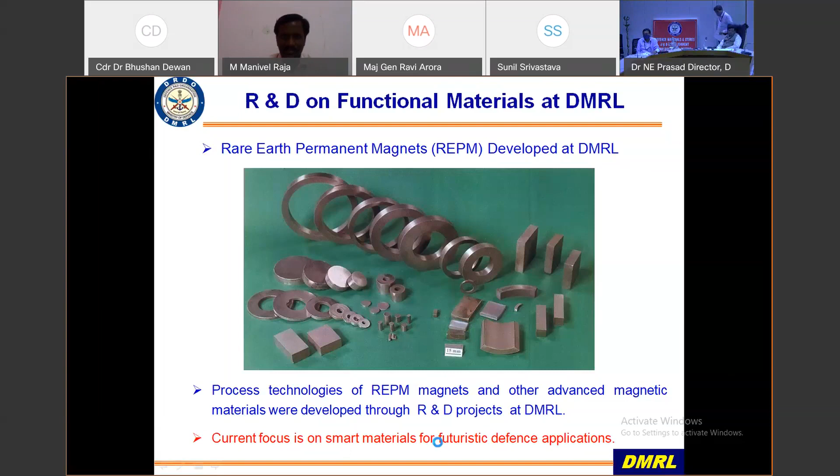Then shape memory alloys - there are two types. One is thermal shape memory, driven by thermal energy. The other one is magnetic shape memory, where the driving force is magnetic field. Then thermomagnetic materials, thermoelectric materials, magnetocaloric materials, and photo-responsive materials. These are the various types of smart materials.

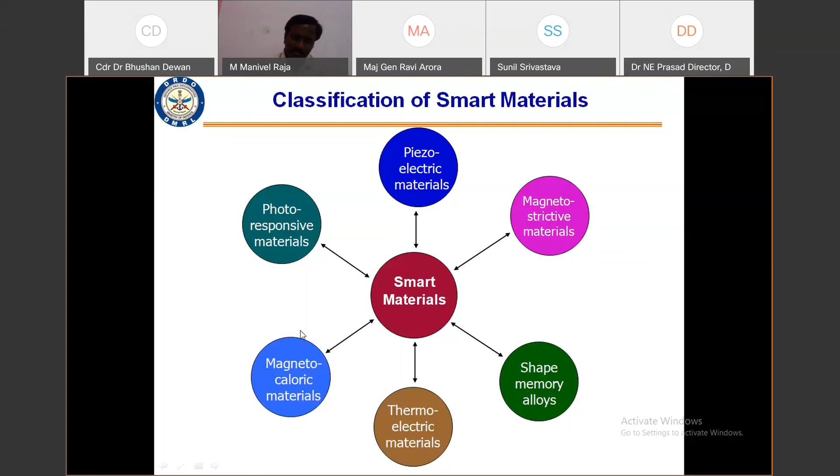So as I was telling, though there are different types of smart materials available, there are three main driving classes: heat or thermal energy is the major important driving force, then electrical field and magnetic field. These three types of smart materials are very famous, and these materials have already been extensively used in many applications.

So when you say heat, here the thermal energy is going to be the driving force. The example for that kind of shape memory smart material is shape memory alloy. It's basically nickel titanium. So here nickel titanium changes the shape when you change the temperature. So you can actuate, you can do the desired functions by simply changing the temperature.

The other type is the electric field driven smart material. Here when you apply an electric field to a particular material, it changes the shape or produces a strain. And vice versa, these are reversible effects. Similarly, if you apply stress on the material, it produces an electric field. The typical phenomenon is piezoelectricity. The very typical example is lead zirconate titanate, PZT, one of the very famous materials. When you say smart material, the first material coming to mind as an example is lead zirconate titanate.

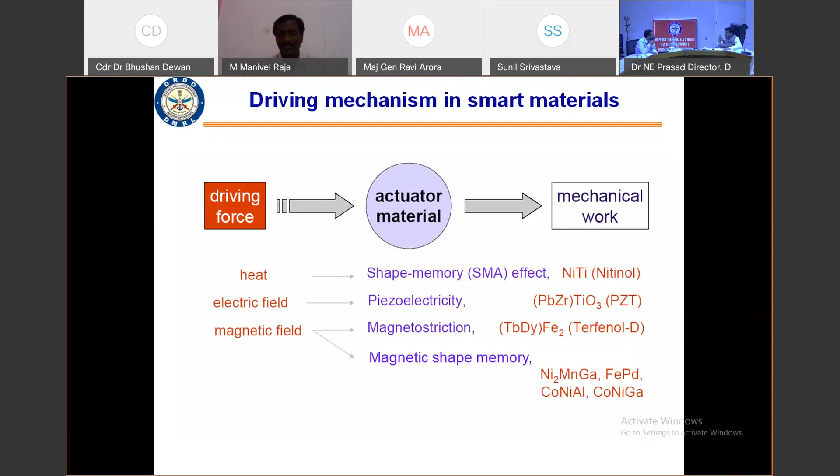So this is the kind of activities going on at DMRL. We have taken up R&D projects on these smart materials. The first one is the magnetostrictive material. This activity was taken up for the development of a sonar device for the Navy. Here the magnetostrictive material will replace the piezoelectric material. The current technology uses piezoelectric transducers in the sonar, but sonar using piezoelectric material works at very high frequencies. So in order to reduce the frequency of operation, the idea is to use magnetostrictive material, which can be used at very low frequencies, about 1 to 2 kilohertz. By reducing the frequency, we can increase the range. That is the advantage of magnetostrictive smart material.

The second material system we are working on is magnetic shape memory alloys, which is very similar to nickel titanium, but here the external stimulus driving the system is the magnetic field. Again, these materials can be used as sensors and actuators in many applications. The third material system DMRL is working on is a very new one, magnetocaloric materials, another class of smart material. These are very useful for magnetic refrigeration, an emerging technology. And the last one, we are also working on piezoelectric material, right now concentrating on piezoelectric material for electronic filter devices for the seekers.

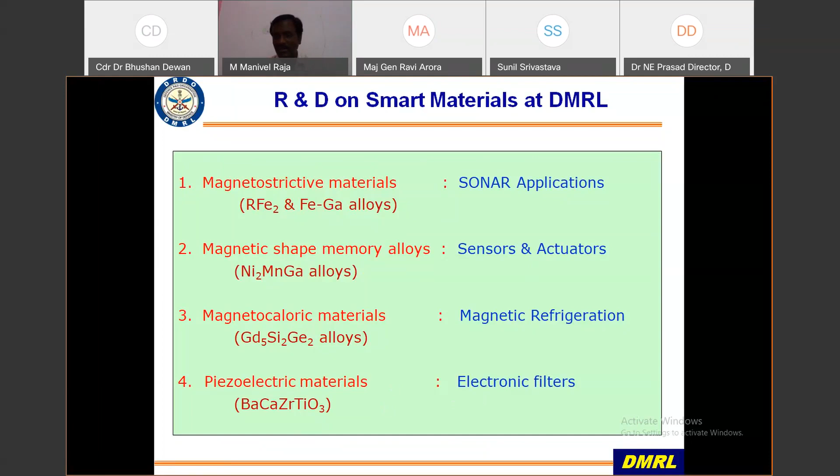So I will start with the magnetostrictive material. The phenomenon of dimensional changes in a substance when it's exposed to a magnetic field is called magnetostriction. It is also known as the Joule effect because it was discovered by Joule. Magnetostriction can be positive or negative depending upon the changes in the dimension of the material. For example, when no field is applied, this is the original length of the magnetostrictive rod. When you apply a magnetic field, there is an increase in length, so lambda is positive. This is a positive magnetostrictive material: when it is exposed to the magnetic field, its dimension increases.

Now if you apply a time-varying magnetic field to this kind of material, the rod starts to vibrate. These vibrations lead to the production of sound waves, which can be used as a transducer in sonar systems. Not only sonar, magnetostrictive materials have many applications. Sonar is one of the defense applications. It can be used as actuators, in smart wings for actuation, adjusting the wing positions, and another important application.

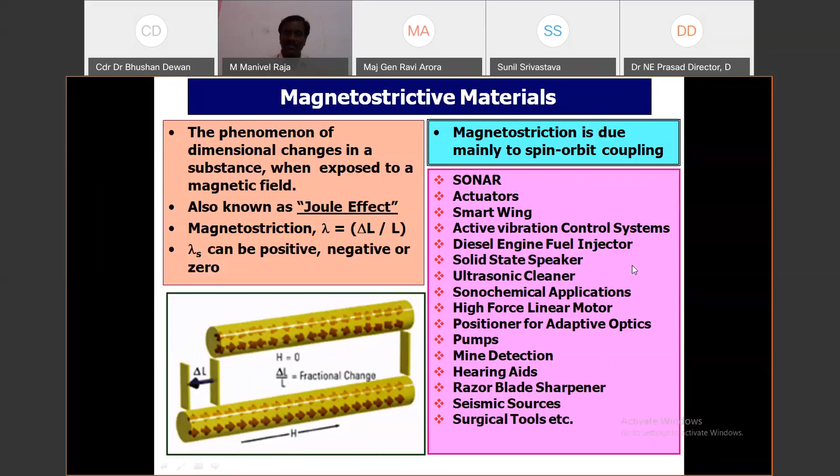Then adaptive. It can be used in micro pumps and mine detection, hearing aids, seismic sources, and it's also used in surgical tools. So these are the various applications using the magnetostrictive material. So DMRL is working on this material for the last 5 to 6 years, and we have developed the manufacturing technology for making these rods.

So this is the typical rods for the magnetostrictive material, which is basically dysprosium, terbium, iron. This is the material system that we have developed at DMRL. Basically this is developed by the directional solidification technique, which facility has been established at DMRL, and we have made the process technology for making the magnetostrictive rods.

These are the final products that have been developed at DMRL. Typically this is 20 mm, 30 mm diameter of the rod and 100 mm length. These rods will be used in sonar as transducers. These rods will be subjected to a time varying magnetic field, and when it undergoes a time varying magnetic field, it produces sound waves, which are used in the sonar systems.

And this is the typical characterization curve of the material. Basically magnetostriction is measured as a function of magnetic field. You can see that a maximum strain of 1400 has been obtained in DMRL alloys.

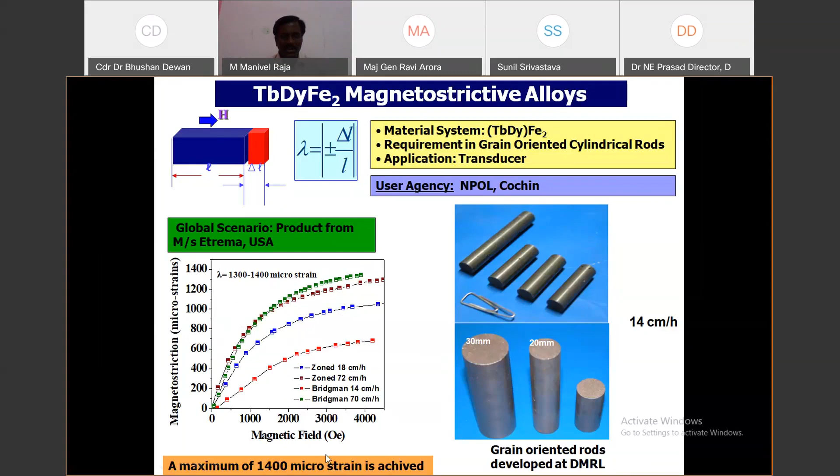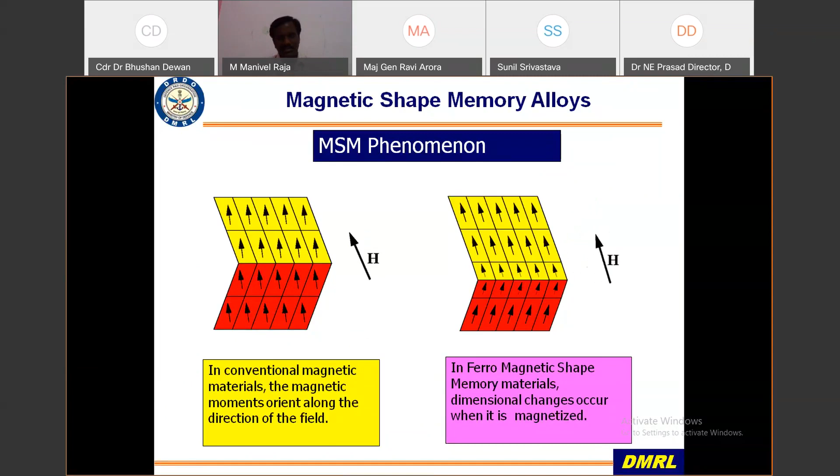The next one is the magnetic shape memory alloy. This is very similar to nickel titanium, but as I said, the actuation phenomenon is due to the magnetic field. When you apply a magnetic field, the orientation of magnetic domains in the material changes. As a result, it changes its structure. So that is the principle of these shape memory alloys. This also has a lot of applications like magnetostrictive material.

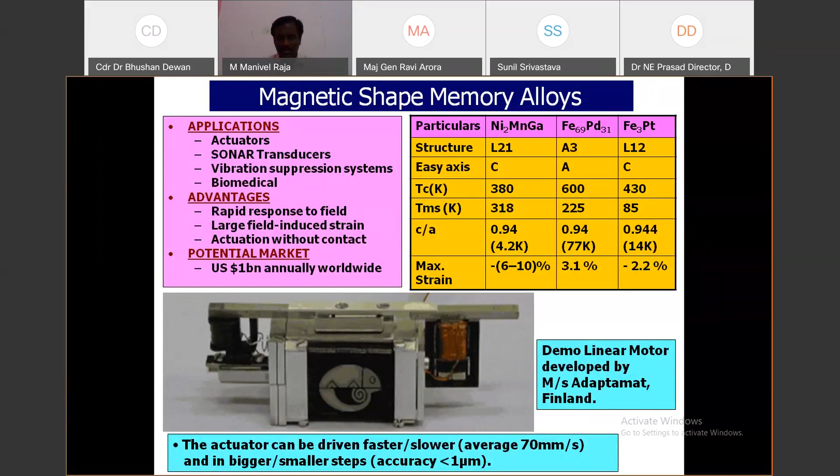So here, this is one example of how this magnetic shape memory alloy can be used in an actuator. This is one typical example. This is the linear motor which is developed by the Adaptamat Finland company using magnetic shape memory alloys. So DMRL just started this material. This material also has similar applications like magnetostrictive material. It can be used for sonar, actuators, and sensors.

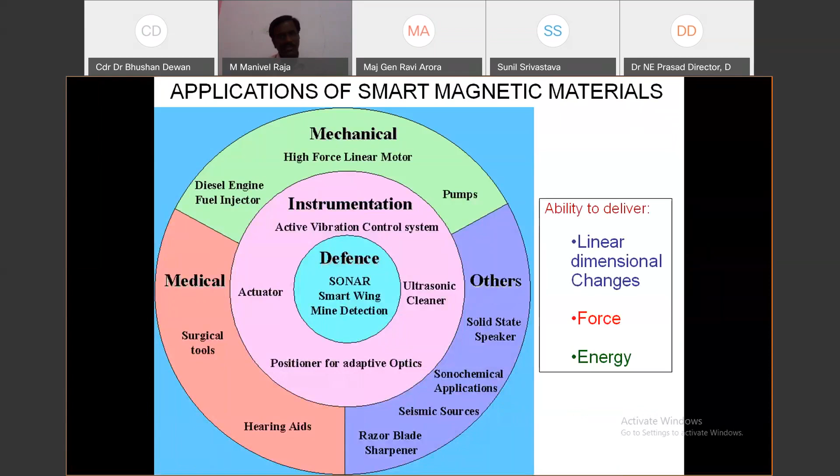So at DMRL, again, we are using the same processing technique which is used for magnetostrictive material for this material also, using directional solidification techniques. The material system that we have developed at DMRL is again nickel-based alloys. It's nickel, manganese, and gallium. It's a ternary alloy.

It's a ternary alloy system, and you can see here the difference between the magnetostrictive and the shape memory alloy: there is a structural change in the shape memory alloy, which gives rise to the change in dimensions. This is the typical crystallographic structure of this material. This is the magnetic properties.

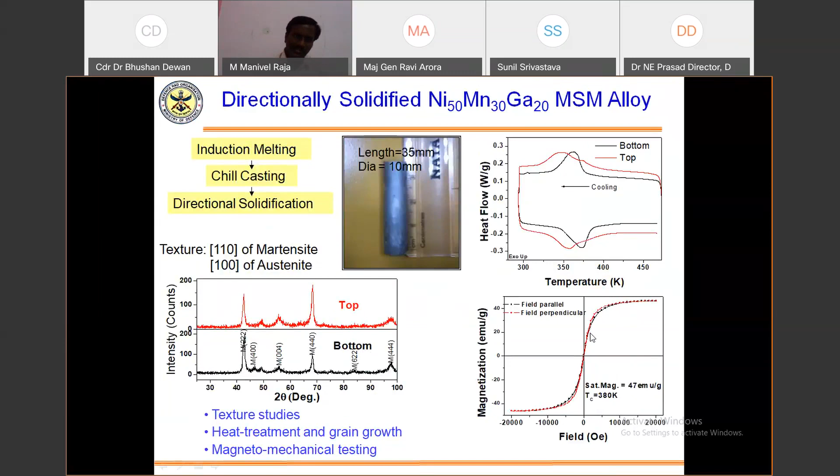So the next material is the magnetic refrigeration system. This is based on the magnetocaloric material. This is one of the emerging technologies. In magnetic refrigeration, the magnetocaloric material is used as a refrigerant. In conventional refrigeration, CFC, chlorofluorocarbon, is used in the gas compressor; the compressor is the main part in the conventional refrigerating system. Whereas in magnetic refrigeration, there is no compressor used.

So the advantage of this technique is that no compressor and no chlorofluorocarbon is used in this technology. Instead of CFC gas, a solid state magnetic material is used as the refrigerant.

And since no CFC is used, it is eco-friendly. It's eco-friendly, and there's no danger to the ozone layer. And since no compressor is used in this technology, it's very compact and the efficiency is very high. The maximum efficiency can reach 60 to 70%, whereas the conventional refrigerator or air conditioning works at only 30 to 40% efficiency.

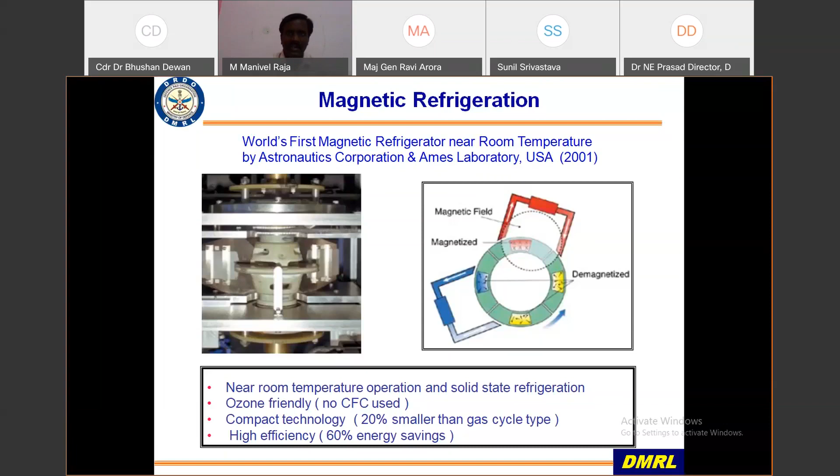So in terms of efficiency and performance, in all these ways, this magnetic refrigeration appears to be very promising, and many countries are working on this technology to realize it for practical applications. So one of the most important requirements for realizing this technology is the magnetocaloric material. The magnetocaloric material is the heart of the system.

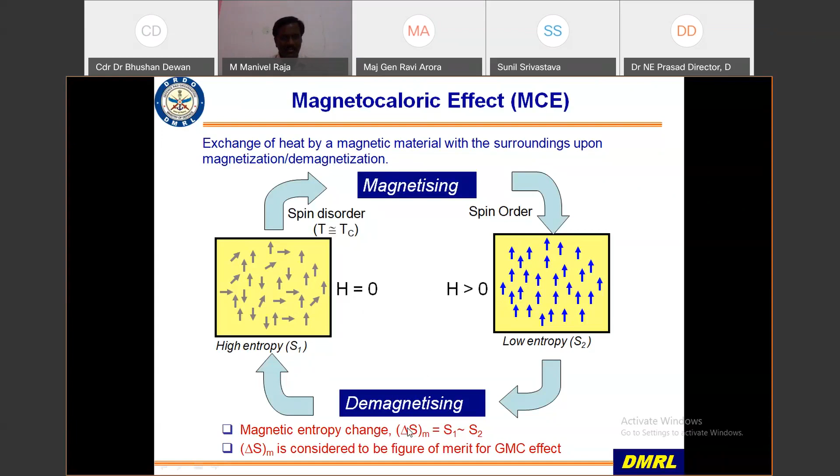So when this magnetocaloric material is exposed to the magnetic field, it is heated up. That heat is removed by circulating water. And again, when you remove the magnetic field, it comes down to the disordered state. Then it takes heat from the surroundings. As a result, it gives the cooling effect. So that is the principle of the magnetocaloric material. The material should have a large change in entropy when you apply a magnetic field. So that is the figure of merit for this class of material.

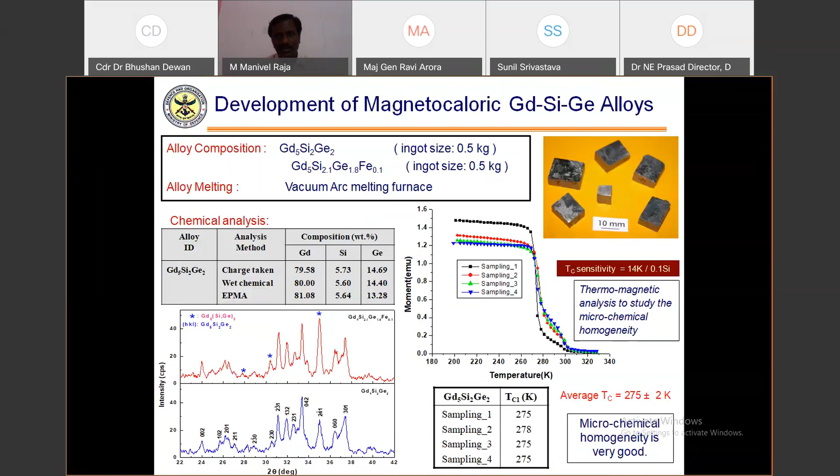And you can see these are the various stages of the development, like chemical analysis, magnetic and thermomagnetic measurements, and structural studies. All these characterizations will be carried out to understand the material system and produce a material with the required properties and compositions. These are the functional properties of this material.

Now we are interacting with GE, the global engineers in GE Bangalore, for designing and making a magnetic refrigeration system. So that interaction is going on. We are also identifying Indian industry which is interested in using this material for making magnetic refrigeration for futuristic applications. So this refrigeration system can be used for various defense applications also.

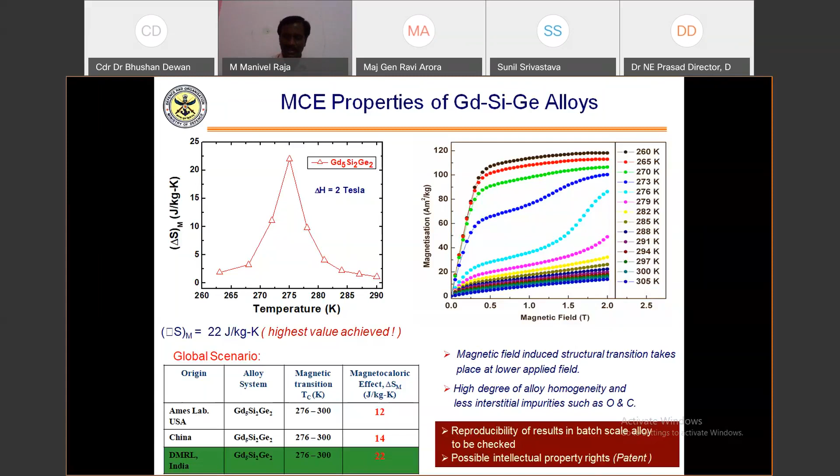So I have covered mainly the magnetic smart materials. We are also working on nickel titanium based thermal shape memory alloys. Then we are also working on piezoelectric materials like lead zirconate titanate and non-lead piezoelectric compounds like barium calcium zirconium titanate. So those materials are being investigated and developed at DMRL.

So finally, I will come to the conclusion. I have covered three important smart materials. All three are basically magnetic smart materials. One is the giant magnetostrictive material, which is developed for sonar applications and will be used by NPOL, a DRDO lab. Another material is magnetic shape memory alloys, which is still under R&D because there are still some issues in using them in applications. The R&D is going on.

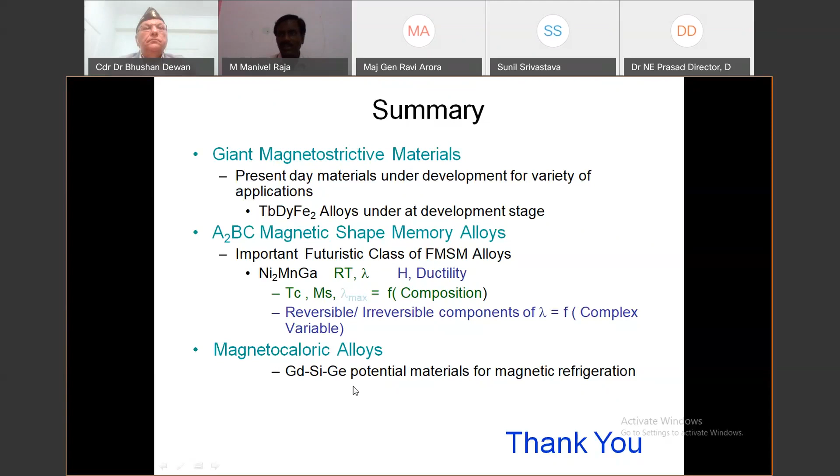And the magnetocaloric material, which is for the magnetic refrigeration system; the refrigeration can be used for many defense applications, as well as having a lot of potential in civilian applications. So as far as this alloy system is concerned, the material has been developed. We are looking for partners for taking up this material for making magnetic refrigeration. With that, I will conclude my talk.

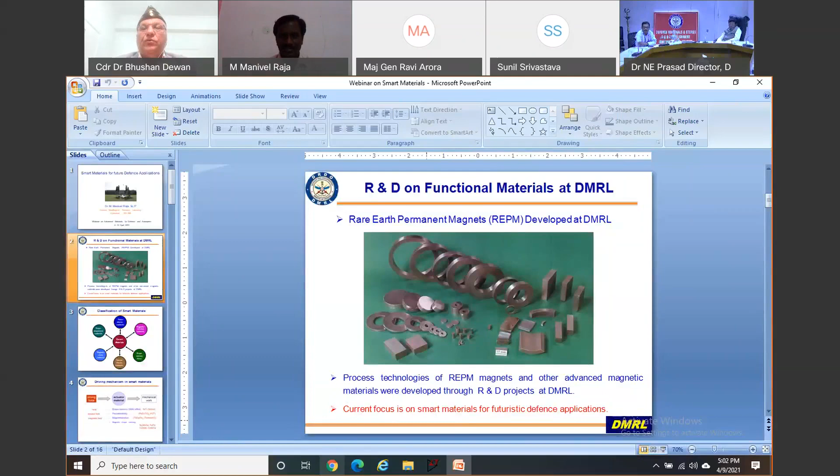First of all, sir, you mentioned the example of helping out Indian Rare Earths for their plant in Visakhapatnam. Then you also talked about trying to reach out to General Electric. I think, as they say, the proof of the pudding is in the eating. That is where the proof of concept and the proof of our research will come. What is the timeline, if I may ask, to hold hands with GE? What is the timeline, target line?

With respect to the GE interaction, we have some problems. GE is asking 100% IPR rights, and DRDO is not willing to give 100% IPR rights to GE. The DRDO policy is 50-50, GE 50% and DRDO 50%. That is not agreeing, so that is where some issues are there.

So now we have almost stopped the interactions, because without the IPR agreement we are not able to go further. Right now we are looking at an Indian partner who can take up this material for magnetic refrigeration.

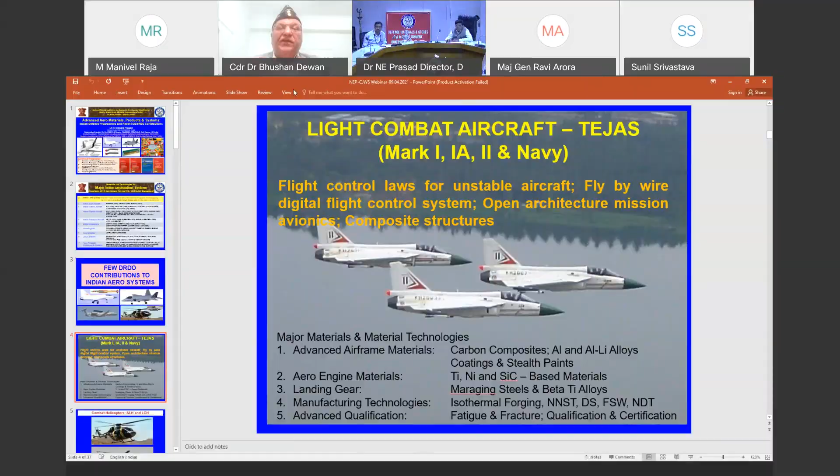Another minor question with respect to other countries, let's say China, for example. How are we placed vis-a-vis in terms of cutting edge technology? Are we there? Are we behind? How behind or how forward?

As far as magnetic refrigeration is concerned, all the countries are at R&D level only. No practical refrigerator has come to the market. It is still at the R&D level and will take some more time, but it's one of the very important technologies required for India.

Bhushan sir, all these applications are most advanced alloys, almost like compounds, and their process windows are extremely difficult. So the processing technologies are very specific for certain applications. The shapes of the components, materials required, all minute details, engineering has to be done, and a large number of parts have to be made whenever it becomes specific to the system.

So when we have a system, we have the capability of making them. That is what is demonstrated by DMRL to a large extent. And we can take up whenever there is a large number, at an industrial level or with a foreign collaboration or within India. That's what DRDO shows. We have the technological capability to do all these advanced materials, even the latest of the world.

Okay. Thank you so much. Let me now introduce the next presenter, Dr. N. Iswara Prasad, Scientist H and Director, DMSRDE. He has made significant and outstanding contributions to the design, development and airworthiness certified production of several aerospace and other advanced materials, especially for the LCA.

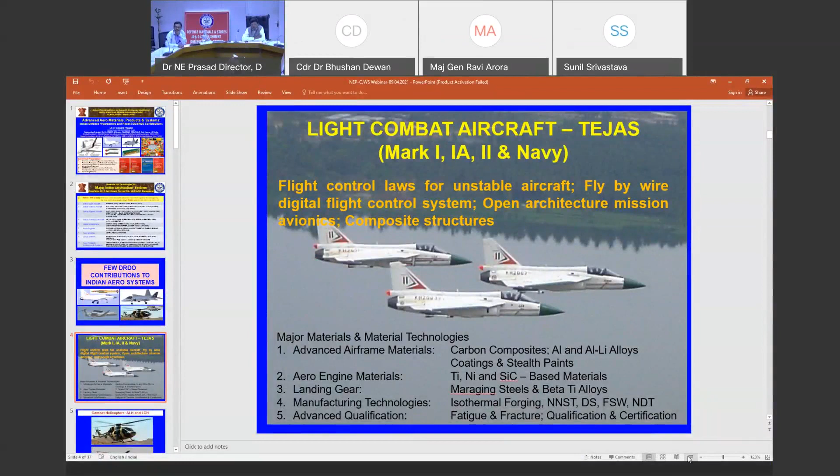It's an honor and privilege for me to talk in front of such an audience, keenly listening to look at Indian defense requirements in terms of materials and what we can achieve today. Sudhanshu, you can fix the presentation. Compared to the first part I presented, only to show what India had worked on from the beginning till exportable items, we had talked about what is required for aero materials, because that was an aero session.

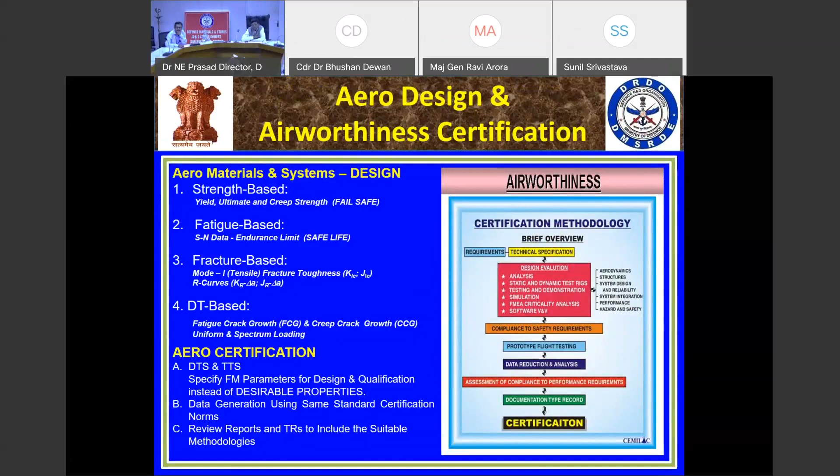Now I'll switch over, next slide. A few products, again only aero products are concentrated, but some more products I'll talk about in my presentation on DMSRDE. You will see that even a small lab like DMSRDE does a lot for Indian defense and what we can do for the nation. When I complete this 15-minute presentation, you will see that the materials canvas is very large and one has to be selective to suit a particular material for a particular system.

This also I presented. The only engine India has developed, qualified and put into production is the Kaveri's jet fuel starter, in which four casting components have been done through technological innovation, such as getting a uniform grain structure in the rim and the blades. These are some of the innovations done to make them qualified. Otherwise, these aero components will never get qualified. Next slide.

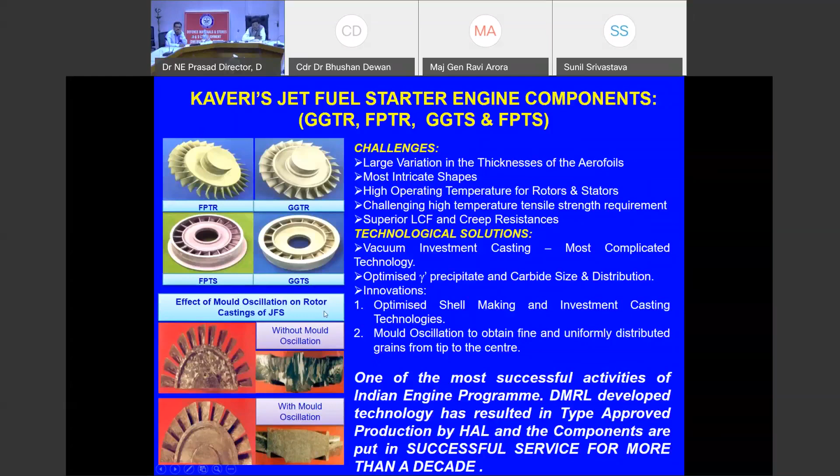So this is a complicated technology. I talked in the morning about Supercast 247A remelt stock. That means it is already melted and remelted. Only by that we can get a compositional control. But still it is an extremely difficult technology because we are looking at a very highly sensitive chemistry, without which we cannot get these gamma prime distributions done at a microscopical level.

You can imagine each of the precipitates is only a few nanometers to a few hundred nanometers. And all of them have to come into the grade where you can go right from directionally solidified blade to these, each one is a single grain. And in that grain, we should have all this phase distribution in a particular manner. And then we also have to have some serpentine type of air channels. Only then we can have the aero blade which will be qualified.

So the qualifying of this melt itself will be proven at the blade level, not at the melt level. So that kind of aero qualification comes into picture, and the development which is done in the lab will have to be taken to the industry in limited series production, then mass scale production, then assembly, then the engine testing, which is a long way off. Next one.

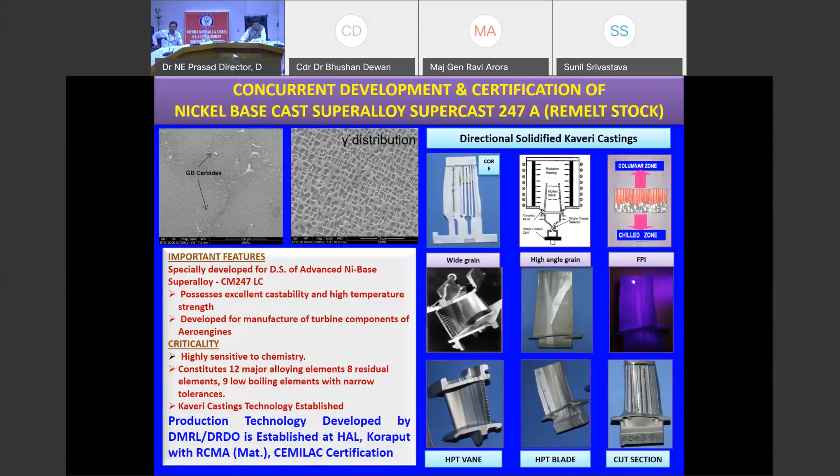Then we have APL castings, very much required for the multimode radars, which are mounted on the LCA to do all telecommunications required for each of the aircraft. And these things, you can imagine, right from 1 millimeter to 32 millimeter wall thickness had to be done in a single casting, and the casting is an air melt casting. The alloy is a simple aluminum alloy, but the casting itself has to be done in an air melt.

And as I said in the morning, when we made this alloy to be qualified to grade A qualification, the yield was 0. That means all castings were falling below the standard because some minute inclusions and things like that will come into that. And then radiologically, when we qualify, none of them will qualify because the stringent aeronautical qualification precludes us from using that alloy.

But when we changed the standard from A to B, allowing a certain amount of only a few ppm or even a fraction of 1 weight %, we were able to go up to 20% qualification or yield. Later, when I left CEMILAC, we were able to go up to 65% of castings passing, which is an international record in terms of air melting castings.

So if there is enough requirement, continuous activity, then constant development, it's called concurrent development, then we can achieve anything. The only thing we require is a system which is required in the long term. And the gestation period in any materials development is very high. So one has to have patience to handhold the developers and the industry to mature materials and systems

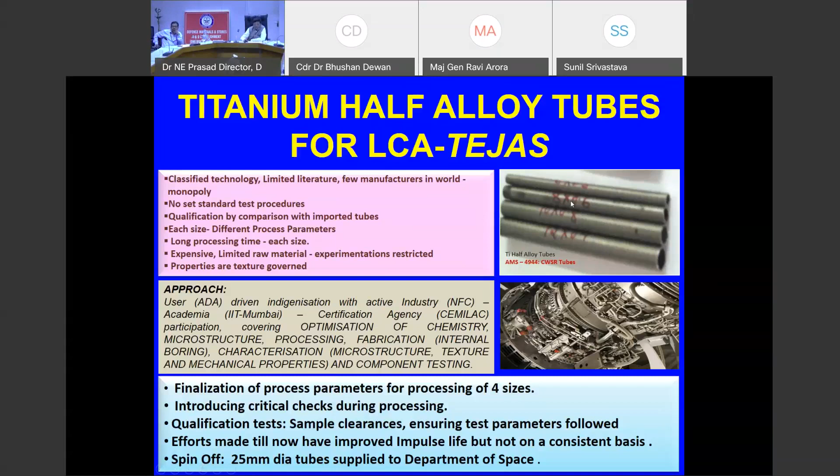Then we have beta titanium alloys, which are considered the technology. If you can do this, you're supposed to be an advanced country in terms of material processing for aeronautical applications, because beta titanium is extremely difficult to make. In fact, many people fail during the process of ingot making itself because it will crack into two if you do not even cast it, let alone process it to the final shapes.

So we were able to get thin sections like this from the beta titanium alloys, qualified now aeronautically. This is the only beta titanium alloy which can replace maraging steel one-to-one in terms of specific strength, and still retain much more advantages in terms of specific modulus as well as slightly higher thickness sections, which is not possible for a high strength alloy like maraging steel. But it has got extremely good corrosion and erosion resistance. That is an added advantage.

So landing gears which were made earlier from maraging steel are replaced with beta titanium, and the LCA2 will have landing gears from this alloy.

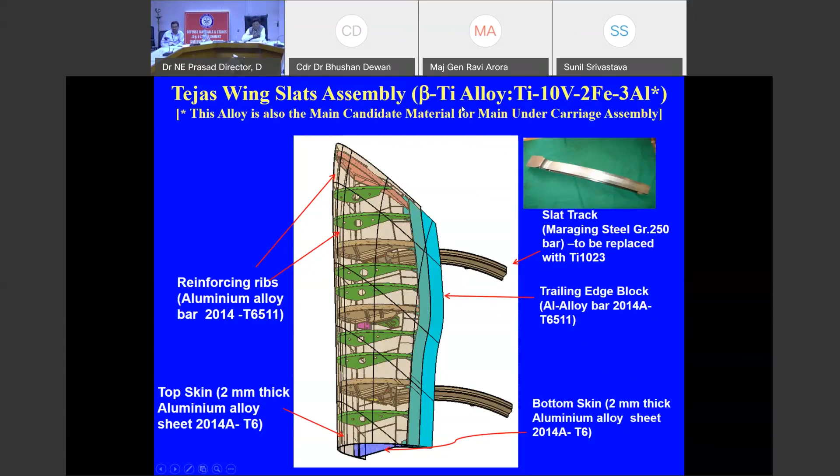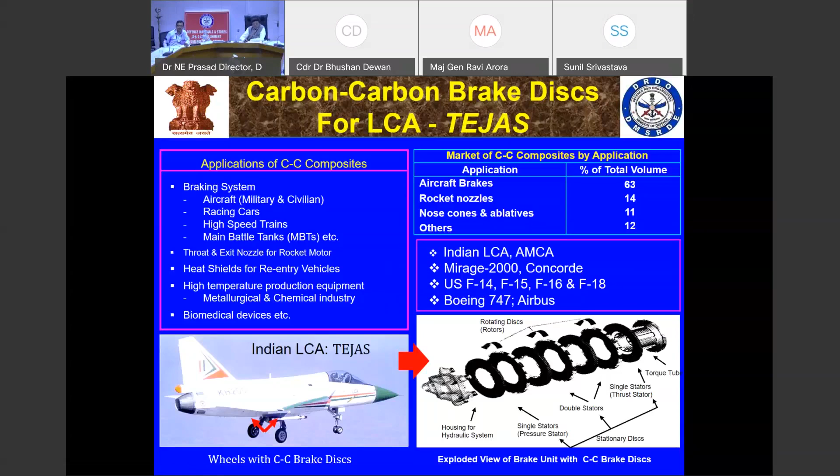So the carbon-carbon composites are developed and qualified. The only thing is, from 350 LCA landings, we have to go to 800; then we are internationally best. Limited trials of our own Indian effort show that we could go up to 500, but consistently we have to reach 650 plus. Then only will we become an international player if it had to export this one. But for the Indian program, this is acceptable.

Next, I stopped here in the morning talking about the Indian prototype for select aerosystems. I cannot cover all the prototype development going on for various Indian aerosystems, but I'll give a few examples which will tell us the challenges we faced, how we overcame them, and how we delivered. Next slide.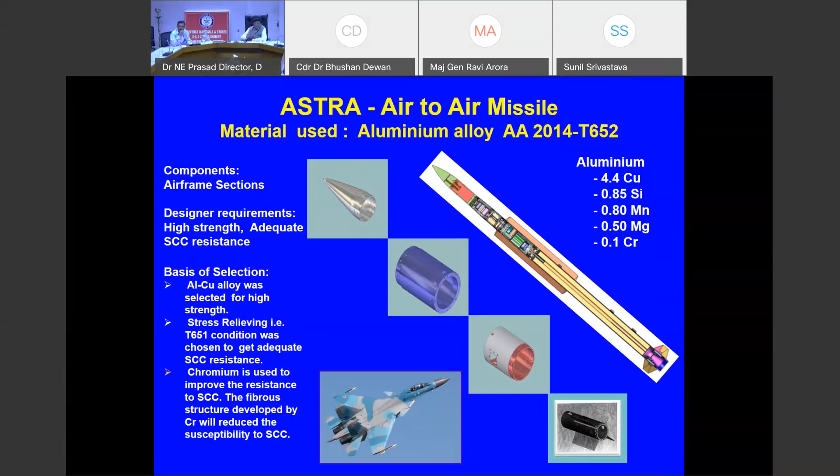Then our LCA will become what you call a system on itself, where when it becomes weaponized, its value will go 10 times higher.

Next, we have Helina missiles, which are also very important. In fact, the NAG, which was very difficult to produce under the IGMDP program launched by Dr. Kalam sir, is now matured for helicopter. So the helicopter mounted NAG missile is called Helina. This is an extremely difficult missile because it has to take aim at only very short distance, and the telemetry has to be done very carefully.

Lightness is very critical. So we tried titanium alloy with a nominal composition having properties of 820 yield strength, and a very little fracture toughness of 40. Let us compare this 40 value - I'll not talk about the complicated number like fracture toughness in detail, but Maraging steel has got 100 to 120. So for the Helina to qualify, it needs a minimum fracture toughness of 55 plus.

So when we did the alloy design, what we could do is reduce the interstitials in the titanium alloy, Ti-6-4 alloy, in terms of carbon, hydrogen, oxygen and nitrogen. We reduced its total content from 0.45 weight percent to less than 0.1 weight percent. This is called extra low interstitial, because low interstitials actually decrease the yield strength, but they tremendously improve the fracture toughness. By heat treatment of this titanium alloy, even at the low interstitial level, we could almost retain the yield strength and improve the fracture toughness by 50%.

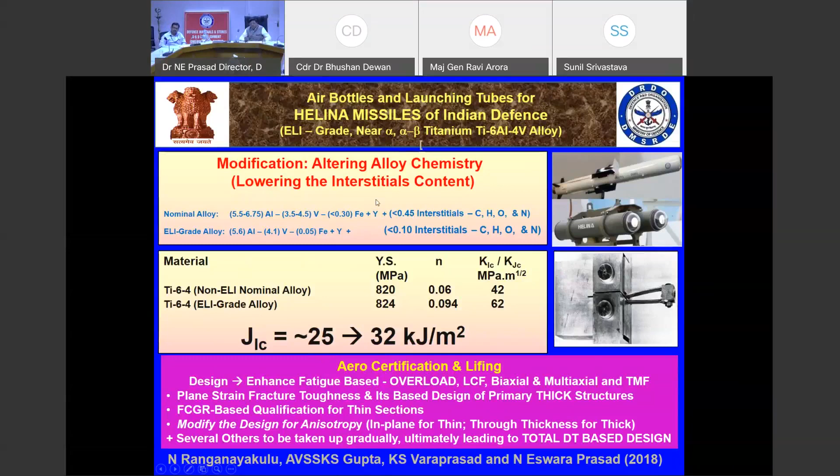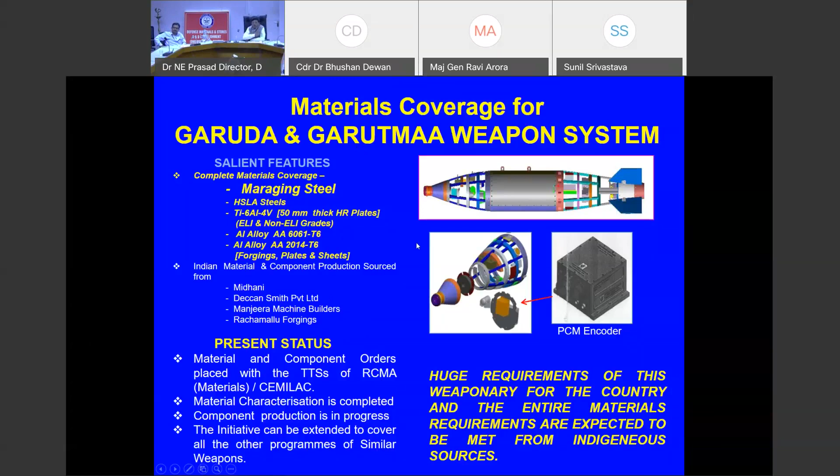Next, we have a very important guided missile, the Garuda and Garutma. Garutma is actually guided, and now it is even made stealthy - I'll talk about it. This is very important because it is where a very low cost effective weapon will become available to the Indian Air Force and other agencies. It has got lots of materials built in, so it's not one or two critical materials - there are many materials which have to be type certified and productionized at economic cost to make even 20,000, 30,000, 40,000 units. So these are large, huge numbers required, and economy also comes into picture as compared to high value missiles like Helina or Astra.

Next, I am talking very briefly about the program which we led from DMSRDE, with 5 other DRDO laboratories, DMSRDE being the nodal lab, to make the stealth materials in a reproducible manner at the industrial level and then produce them at different centers - Defence Lab Jodhpur, Naval Materials Research Lab at Ambernath, Advanced Systems Lab at Hyderabad, Aeronautical Development Establishment at Bangalore, and R&D Engineers at Pune. All these people interacted with ADA. Dr. Subbareddy talked in the morning about what all is required for this kind of system for the Tejas.

Now we are moving to AMCA, which is actually weight-wise more because the stealth comes with a penalty. We have to have not more than 5 to 10% extra weight, 5% actually, to incorporate the stealth features so that we can retain the lethality and become invisible to enemy radars. It is not that stealth aircraft are not made or tested in the world. For the last 60, 65 years, different countries have tried stealth aircraft, but the radar capabilities are also improving much faster than stealth capabilities.

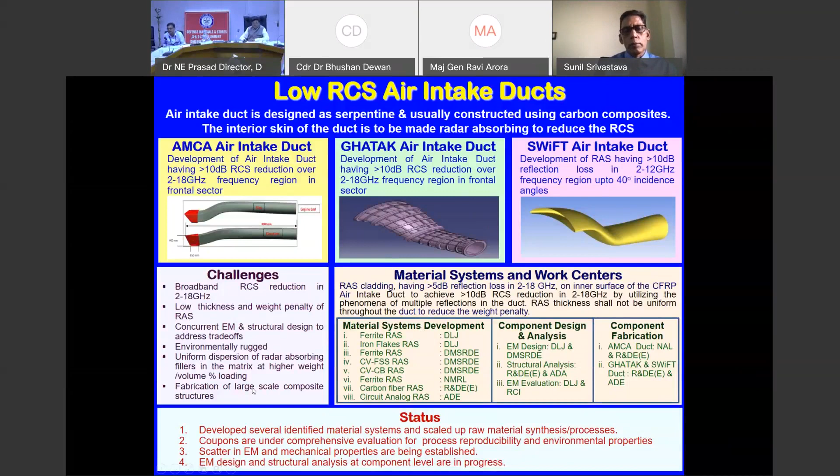Then we have material ready for AMCA, which should be going into the first prototype by 2024. And by 2022, we have to make the first prototype of each individual component. Then it will be integrated and tested as a system.

Dr. Prasad, sorry to interrupt. But I'm completing in 2 minutes, sir. Yeah, okay, okay, next one.

So these are all the important material programs that DRDO has worked on, where I was a part of it. So you can imagine, of the programs of national importance that I know of, 22 programs are aeronautical materials programs compared to 40 which are equally important and tough for other systems. But what is the advantage? Aeronautical materials, if you develop them, can easily be adapted to other systems and other applications. So that is the biggest advantage.

And this morning, the chairman of DRDO talked about the national material policy, in which I am the chairman for the stealth materials committee and also a member of the aluminum materials and ceramic materials committees. Then we held the Niti Aayog programs for technical textiles. Similarly, there is a national material standards committee under MoD. All these things make materials available to the Air Force or even air systems.

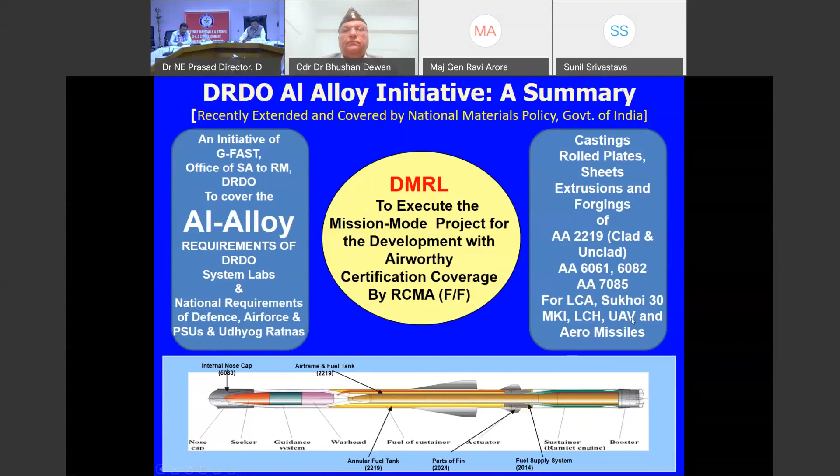Next one. This is a program where aluminum alloys are developed in a composite program by DMRL. And now all aluminum alloys as a value addition are available for all these systems. Next one. Then we have a new alloy called aluminum lithium alloy. The whole world is looking for this alloy, but until new aircraft are made and the new design is accepted, these materials will not take shape, because shifting from one material to another will invariably increase the cost of the system by 5 to 10%.

When we do that, we have to get the cost compensation in additional features. Lithium is one of the best alloying elements to add to aluminum to reduce its density, but it has its own problems, and now we realize what the limitations are and work within those limitations to make this alloy. If at all AMCA is made with aluminum lithium, it will have property advantages, but the cost will be 5 to 10% higher.

Next one. Then we have a steel bank. I am talking about the other application. For example, for Indian missiles, we put up a maraging steel bank worth almost 300 crore rupees. A few thousand tons were put in a bank from which we can make various shapes of the missiles so that the missiles can be made with less downtime.

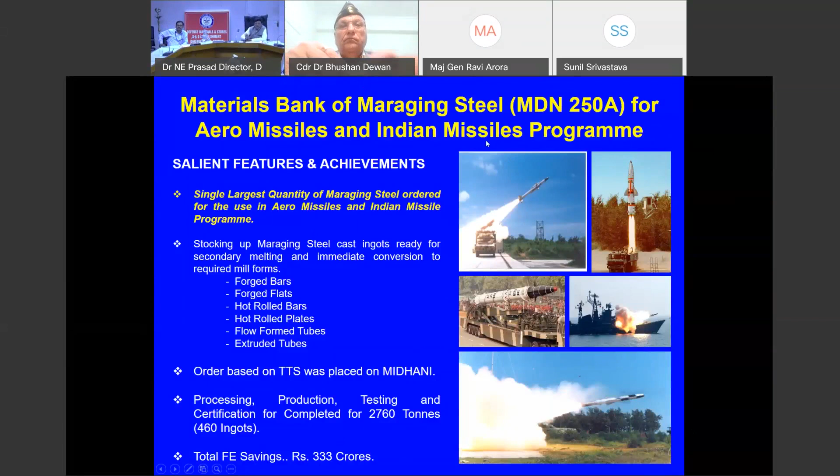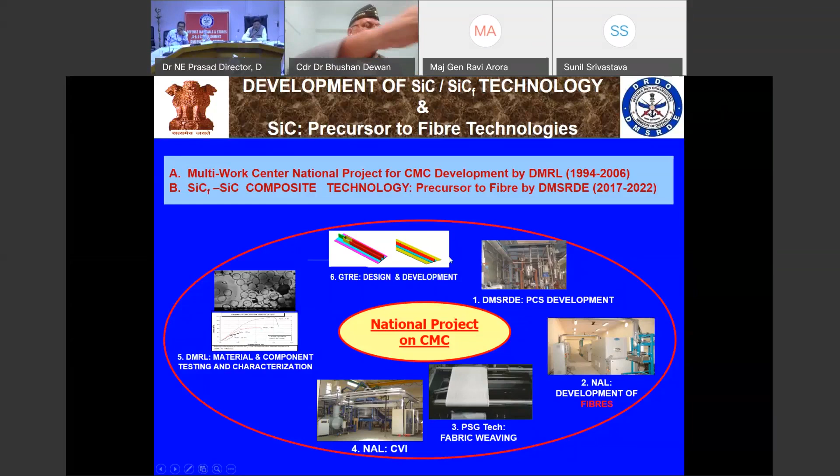Next one. Then we have silicon carbide, a wonder material. If at all a future engine is made only from ceramics, all ceramic material, it will be made from silicon carbide, not as a monolithic material, but as a fiber reinforced composite. And we are trying to go from precursors in this lab to a fiber, and from fiber to a component, whether it is a vane or a disc; that is a huge technology gap. It is only 15, 20 years down the line that we can expect an all ceramic engine. And Vijay Pitle had given a talk on what the future is for this kind of activity. Next one.

So what I wanted to tell you is that aircraft and defense materials are cutting edge materials, and they are the latest and the best. When you do the development technology and manufacturing technologies and establish the infrastructure, everything else can be built very easily and automatically. And number multiplication is very easy as long as a country like India says that we will meet our requirements from our own capabilities. That is the only thing required, the will to do it ourselves.